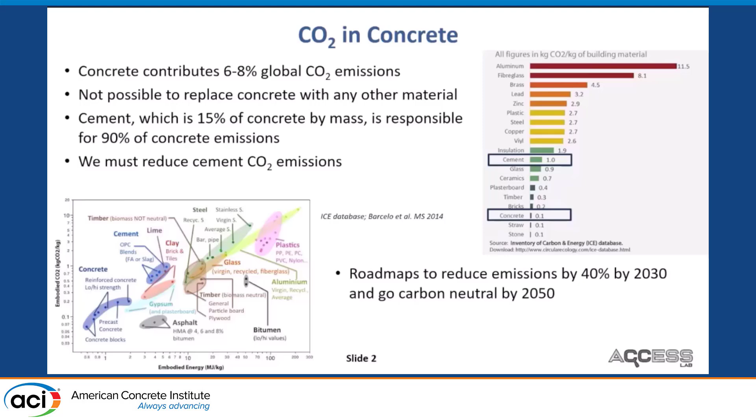So where do the CO2 emissions in cement arise from? So the process of making cement, vastly simplified, is there. You heat up limestone, clay, and a whole bunch of other materials to about 1450 Celsius to produce OPC. The vast majority of emissions come from two things, which is the decomposition of limestone, the heating, and particle size reduction operations. So 60% is roughly from the limestone decomposition, which is not a reaction you can avoid if you use limestone.

So a lot of people, as an example, Brimstone, are looking into whether we can actually replace limestone with something else. Generally speaking, if you reduce cement content in concrete or the limestone content in cement or in clinker, you will reduce emissions. To me, one of the best technologies in the last few years in the US is Portland limestone cement, which, with this one little trick, you can save 10% carbon emissions, that sort of thing. Several folks will argue with me that it's actually very complicated, that Portland limestone cements are responsible for all the evil in the world, but I think it's a pretty cool technology.

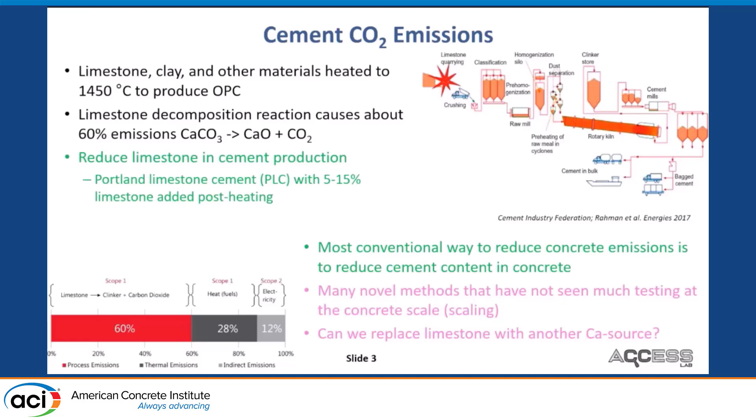A lot of the other newer techniques, technologies, etc., have not seen much testing at the concrete scale. Thankfully, though, the DOE has decided to seriously believe and invest in concrete and decarbonization of other materials. So this is coming, it's just a matter of time.

Now, very quickly, supplementary cementitious materials. So these are finely ground amorphous calcium aluminosilicates. They are fantastic. Everyone loves them because you can replace a substantial portion of the cement in concrete using SCMs. And on top of that, they actually help with strength and durability as well. It's not that every supplementary cementitious material helps every property of concrete, but generally speaking, use supplementary cementitious materials, they will make your concrete better.

Most commonly, fly ash, slag, silica fume had and continue to be used. These are industrial byproducts, but because of changing industrialization trends, we have increasing shortfalls in these materials. So now there's the question of how do we identify novel SCMs? You've heard about calcined clays. That's a fantastic technology, something that many are working on. Harvested fly ashes are something else. Natural pozzolans, I think, have a lot of promise as well.

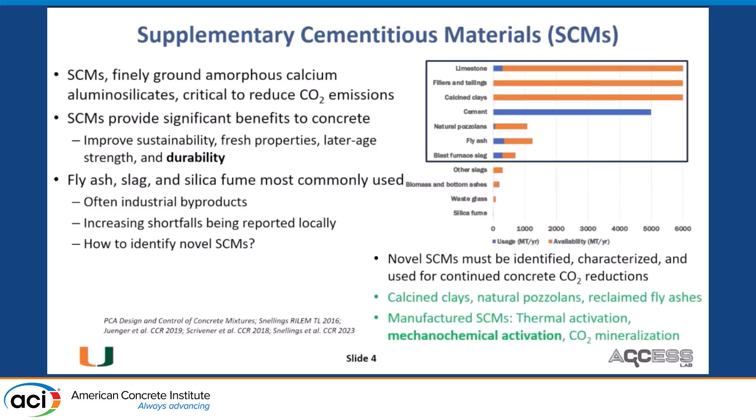But at the same time, a lot of people are looking into manufactured SCMs, Terra CO2 as an example, where thermal activation, mechanochemical activation, or CO2 mineralization can be used to potentially transform or improve inert feedstock into reactive materials. So my focus is going to be on mechanochemical activation, and largely I'll talk about basaltic fines and their mechanochemical activation.

So essentially, mechanochemical activation is high energy grinding. We do it in a planetary ball mill. In the previous session, a ball mill was shown. A planetary ball mill is slightly different. It has this dual rotation. The RPMs are a lot higher as well.

400 RPM or something like that is the maximum in our machine; others go a little bit higher. Broadly speaking, we've worked on basaltic fines, mine tailings, clays, but really, as I said, basaltic fines will be the focus of my talk. One of the most important materials for mechanochemical activation are clays.

You heard previously about specific issues of workability, flow retention with calcined clays. And some of the people who have been doing this at scale, Carbon Upcycling or Polysius, have shown that mechanochemically activated clays potentially have the promise to not have this issue with workability.

The theory gets into complexity, and I'm not saying that you should mechanochemically activate all clays, but the statement I'll make is that if your clay is less than 30% kaolinitic content, there's probably a good amount of potential in mechanochemically activating it, both in terms of reactivity and workability improvement compared to the calcined clays.

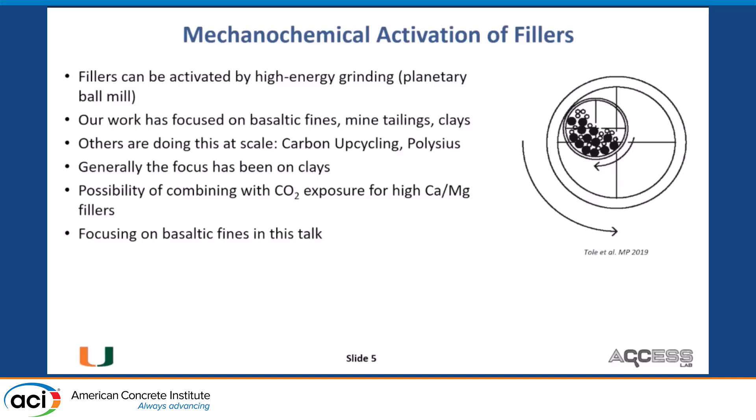Okay, so some results. We had a basaltic fine that we took. This material was very, very inert. And we said, hey, we are going to mechanochemically activate it. We varied the BPR, which is the ball to powder ratio, so just the amount of charge versus the amount of material. And we also varied the grinding time.

So what we see is a very classic mechanochemical response in that the specific surface area increases. It actually increases very, very rapidly. And then it goes down or it levels off after, in our setup, at least 15 minutes of grinding. So we are attributing this to various sort of agglomeration, aggregation, and similar properties. I will be the first to admit we don't have a full handle on the nature of these agglomerates or aggregates. We will at some point.

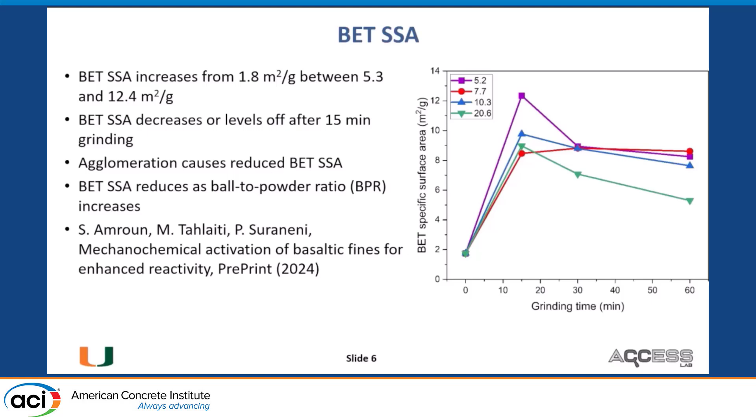So anyway, the specific surface area increases from about 2 to between 5 and 12. So it's a very significant increase in surface area. And of course, you increase reactivity by increasing the surface area, maybe. We see a little bit of a trend that the specific surface area reduces as the BPR increases. If you're interested, a preprint is available on ResearchGate and SSRN, but I'm also happy to send you the paper. Let me know.

So particle size distribution. The initial particle size distribution is very simple. It's near normal. The peak is about 10 microns. Then after mechanochemical activation, this is almost like parting the Red Sea sort of behavior, where you get a very complicated particle size distribution, which is bi- or trimodal in nature.

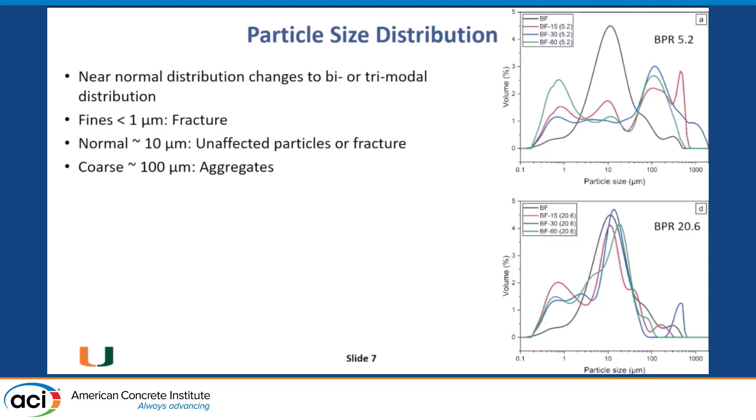So the explanation that I have, at least at this point, is that the fines, which are typically less than 1 micron, are of course created by fracture. The particles around 10 microns in size are either unaffected particles or particles created from fracture of yet larger particles. And the particles which are about 100 microns in size, these presumably are some sort of aggregates, agglomerates, etc.

So we put these under the electron microscope. Unsurprisingly, the results are rather consistent with the particle size distribution. So the raw basaltic fines, the particles are quite angular in nature. They're about 10 microns in size.

After MCA, the particle size distribution is clearly broader. And we do see fines, about 10 micron particles, and coarser particles. So that's very consistent with the PSD. And we see some sort of aggregate or agglomerative behavior. The other thing we see is, generally speaking, we haven't quantified this yet, but there seems to be a marked change in the morphology.

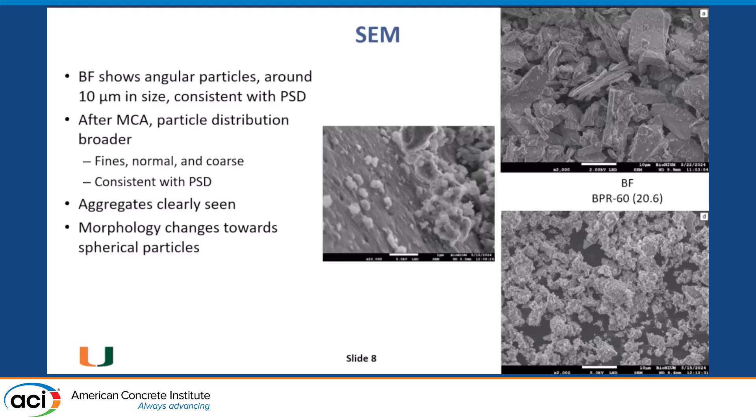That is, the initial morphology, which is angular, starts to become somewhat spherical. So this is great news for the workability, right? That you are forming spherical or near spherical particles. At some point, we'll put in some time, we'll actually get some parameters and say, the aspect ratio or the sphericity changes. We haven't yet done that.

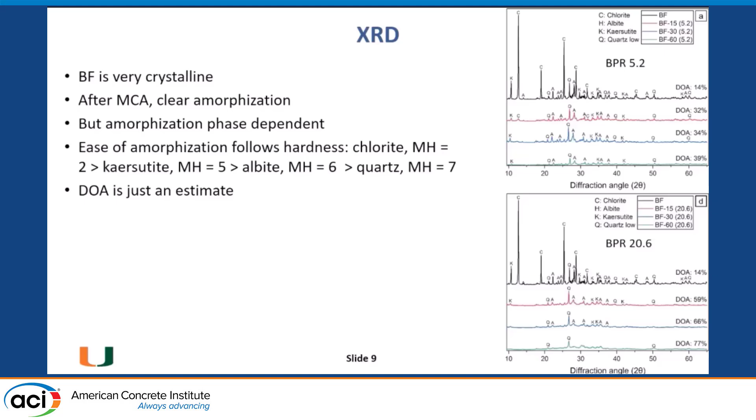However, there is clearly some heterogeneity here, meaning that some peaks vanish very quickly, whereas other peaks persist. And what we found is, qualitatively speaking, the ease of amorphization, that is the ease at which these peaks vanish, depends very strongly on the hardness of these particles. So again, this is just an estimate, but in this system we find that as the Mohs hardness goes from 2 to 7, the ease of amorphization, the persistence of those peaks changes markedly. So again, these are just estimates. I realize that these are not the most perfect numbers, but that's okay for now.

So if you look at the degree of amorphization again, and you plot it against the grinding time, there seems to be a pretty bilinear response, limited number of data points, but it kind of seems that this goes up and then it kind of levels off, although it's not exactly horizontal. It does go up a decent bit.

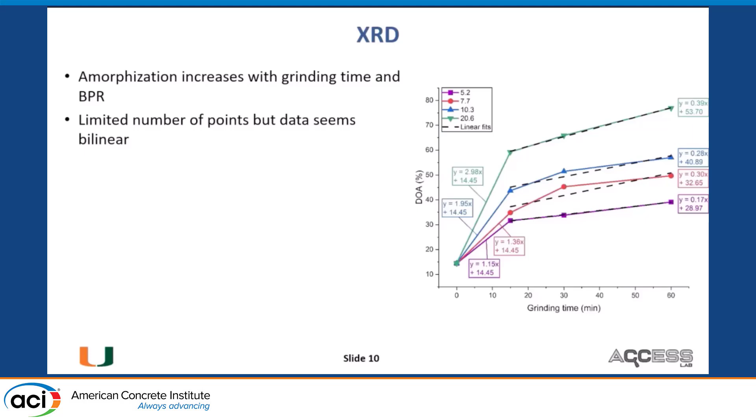So we said, okay, all of this is great, but are these actually useful materials? Are we making them actually reactive? And the good news is we absolutely are making them reactive. So we did a modified version of the R3 test, pretty similar to the R3 test. It's not going to make a big difference in this context, but we see very clearly that as the BPR increases and the grinding time increases, the reactivity increases.

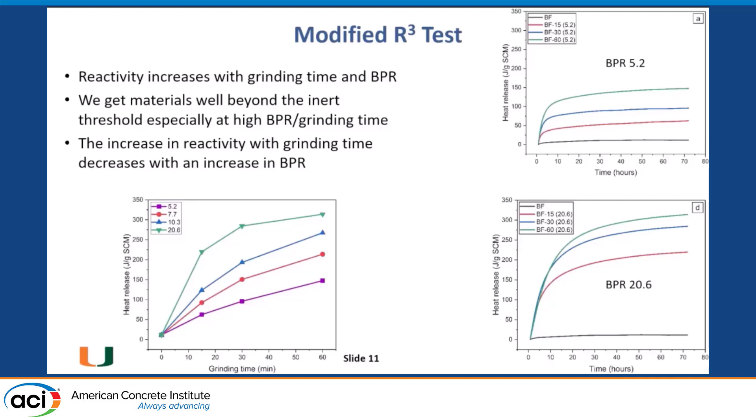And from these R3 and similar tests, the threshold is about 100 joule per gram of SCM. And you can see that, beyond a certain grinding time or beyond a certain BPR, you pretty easily exceed the level of reactivity needed. So again, with increased grinding time and increased BPR, the reactivity increases. So to me, this is one of the more interesting results.

So I said before, right, that the increase in specific surface area clearly results in an increase in reactivity. Actually, that's not the case. We plotted various measures of particle size and of specific surface area against the reactivity, and we did not see any correlation. Yes, we can kind of make the argument that, because of the agglomeration, etc., we probably don't have the best estimates of particle size or specific surface area, and I think that's a reasonable argument.

However, here's my thinking. I think the reactivity is driven by the amorphous content, because basically you can take inert powder and you can start to size fractionate it, but unless you start to get to like nano sizes or something, if something is inert, it generally will stay inert regardless of what the specific surface area is within certain limits, okay? In this case, what I think happens is that beyond 15 minutes, the specific surface area is really not changing, right? So that increase in reactivity because of the specific surface area is largely controlled by what happens in the first 15 minutes.

So when we plot, on the other hand, the degree of amorphization and the heat release, we actually see a really nice, strong linear correlation that suggests that the heat release basically depends on the degree of amorphization, and you have this nice relationship. We tried to include SSA in this. We tried to plot separately with SSA. Absolutely no relationship was seen.

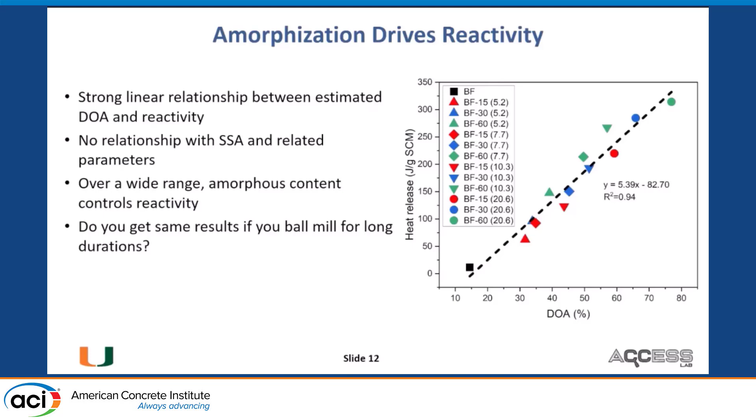Okay, one material is fantastic. What about others? We've actually tested a lot of other materials, and so have others. I only show here the results for 12 materials. So MCA generally works with some caveats. Meaning, what we see is that if you plot the increase in reactivity versus the initial reactivity, you see this kind of exponential relationship. The exact relationship is not so important, but basically what you see is that when you take materials which are very reactive, you don't really do anything to them. So presumably this is because these materials are already highly amorphous to start with.

A fly ash or a slag has an amorphous content somewhere from 60 to 90%. You're not going to make the amorphous content 200%, right? So a slag, actually, we essentially found no real change in reactivity, because presumably you're not really increasing the specific surface area all that much for these materials, because you are getting the finer fraction, but then you're getting the agglomerates as well.

So generally speaking, this works fantastically for filler materials, for materials which have very, very low values of reactivity. But going forward, it's not useful to do this. I would not do this, especially because it's a pretty energy intensive technique, for a fly ash, for example. So that's the explanation that I just gave, that the highly amorphous materials have already high initial heat release. There's limited further amorphization, so limited increase in heat release.

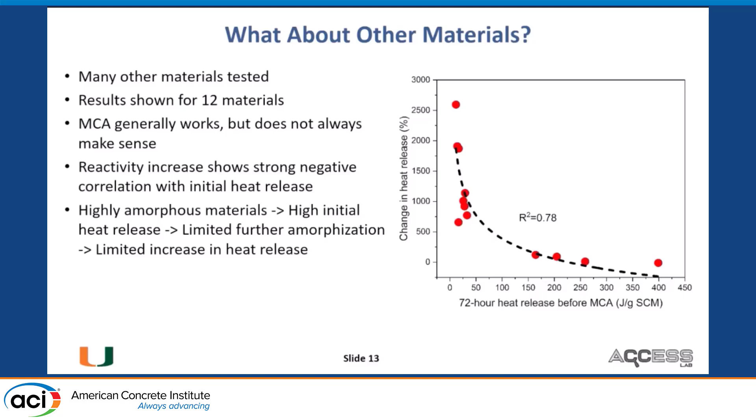Okay, can we do anything about cement pastes and mortars? We did limited work here, but essentially what we see again is a clear effect of the amorphization, that we generate reactive SCMs. So at 30% replacement, the control is up there. I switched those out. I'm sorry, I don't know why I did that, but anyway. These are switched out, the MCAs are the other way around, but the MCAs show substantially higher heat release than the raw materials, but at the same time lower than that of the control materials.

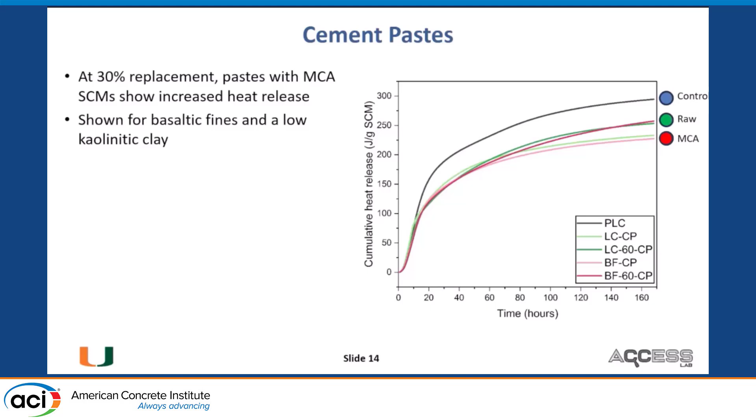Now, we actually looked at cement mortars as well, and this is a work in progress, but we see, for example, improvement in workability. We don't actually see a huge loss after mechanochemical activation in the slump flow, like one would expect with calcined materials. In the basaltic fines, the workability is only slightly reduced, and this is interesting because the specific surface area has actually increased greatly. So presumably there's a competing effect of the spherical particles being generated, which are kind of compensating.

We see in compressive strength over 7 days significant improvement beyond the raw inert fillers for the mechanochemically activated materials. Also at 28 days, we see this sharp increase in bulk resistivity with respect to the control and with respect to the unactivated materials, which confirms again that we've generated substantially reactive SCMs.

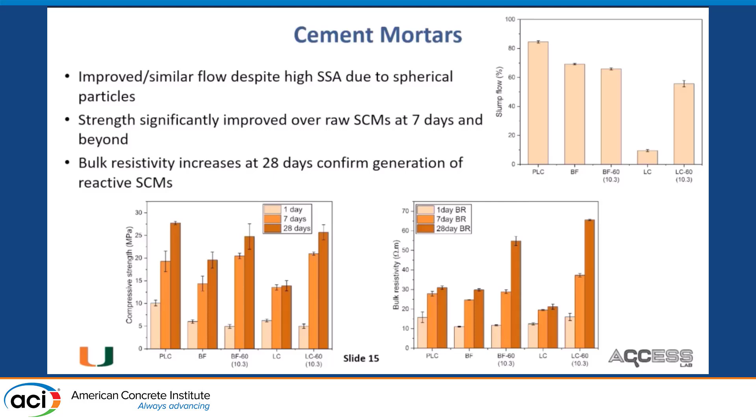So with that, I'd like to conclude. So we studied MCA in the lab for basaltic fines and other materials. The physical changes are really quite complex. There seems to be a trimodal sort of particle size distribution generated, agglomeration and spherical particles. But for the reactivity, I almost feel like this does not matter all that much. But the amorphization, where the extent depends on phase hardness, this seems to control the reactivity.

But the spherical particles generated seem to be improving the workability, a work in progress again. But we have shown MCA for many different materials, and the increase in reactivity depends on the initial reactivity. We see in cement paste and mortars increased heat release, mortar flow, strength, and bulk resistivity improvements.